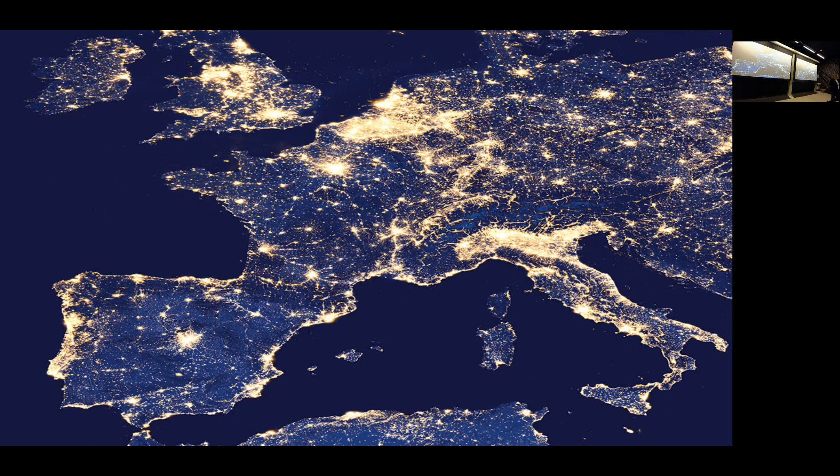We, the transmission system operator, operate the system. We keep the lights on. This is the most complex system ever designed by mankind, so says the National Science Foundation in the US. Very complex, very essential, and we have to change everything in the next 25 years. So it's like taking off in Paris in 2025, landing in Australia in 2040, and while flying, you have to change the engine, the wings, and everything. That's what needs to be done.

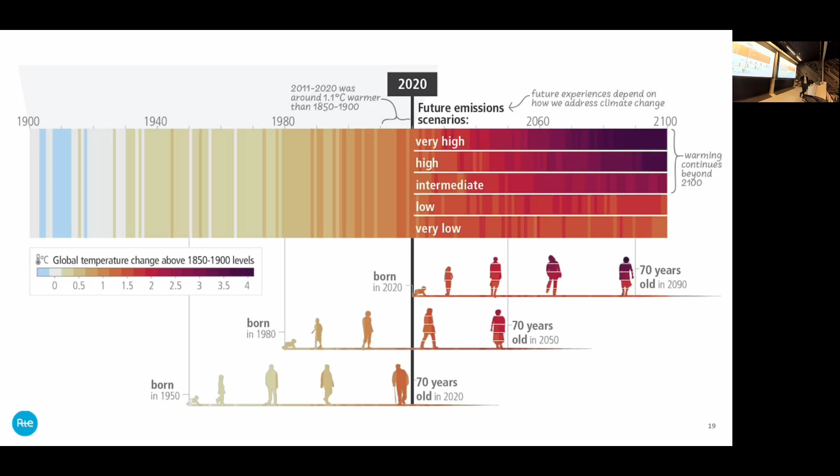We have a problem with climate change, but the top three priorities that we have as mankind are, first, novel entities. Novel entities is a subtle word for pollution, plastic, metals, top priority. The second one is biosphere integrity. We are experiencing the sixth mass extinction of life on Earth at a speed that is unprecedented. The fifth one was caused by a meteorite; this one is caused by mankind. And we are an animal. We depend on that as well.

And the third one is biogeochemical flows, from agriculture, phosphorus and nitrogen. We put a lot of that on the soil to grow the vegetables that are eaten by animals that we eat, and then all of that goes in our toilets, goes in the water, in the rivers and in the sea. And that's a top priority as well.

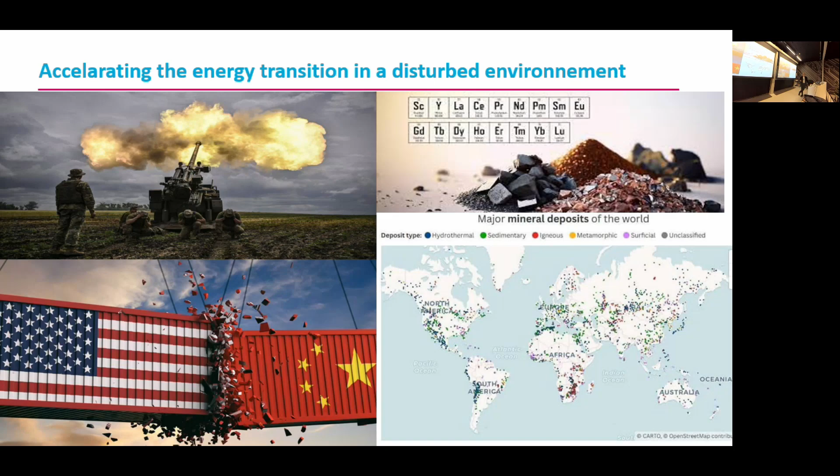So we have to change our whole energy system because of climate change. We have to care about not having an impact on biodiversity and other things. And we have to do that transformation, the energy transition, in a very disturbed environment. We have war in Europe. There is a commercial war between China and the US, and a very hostile environment from China and the US as well, towards Europe at least. And we depend on a lot of rare earths and other metals for the energy transition. So we have to make the transition, but in a very, very disturbed environment.

So do we need to be pessimistic or optimistic? Well, I prefer to be optimistic, and sometimes things are changing. For example, electricity is already the top carrier of energy in the world. There is a lot of evolution, innovation on the electrotechnical side. And that's one thing.

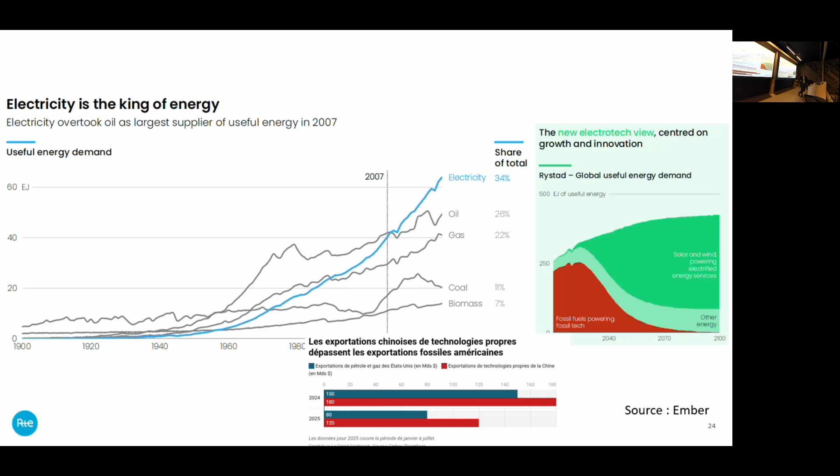And for example, in Europe, for the first time, in December 2025, for the first time there was a majority of electric vehicles among cars sold in Europe, more numerous than fossil fuel cars. So it changed. And sometimes it changed very rapidly.

So do we have to be optimistic or pessimistic? I don't know. We have to be lucid. We have to change very rapidly, but we are not doomed. Let's still do some things. And my hope is that the next Raoul Dufy will perhaps do a painting about what is happening right now in Europe. There will be a new painting of all the innovation that was needed to succeed in the transition that needs to be done.

Now have a look at RTE and its R&D and what we're doing, because there are a lot of things to do, as I mentioned. So RTE, the French transmission system operator, we own, operate, and maintain the power grid in France from 400 kV down to 63 kV. That's more than 100,000 kilometers of overhead lines. It's approximately 3,000 substations all over France. We have 52 electrical interconnections with 6 neighboring countries, soon to be 7, because there will be a new interconnection with Ireland in the coming years.

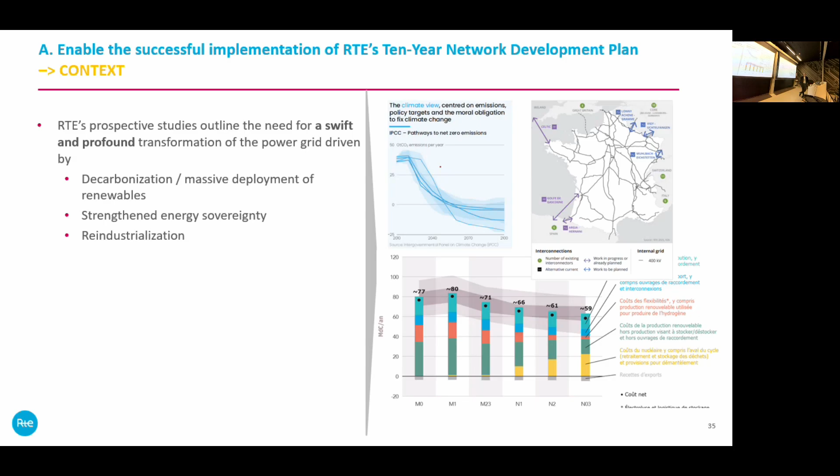So we identify 3 main scenarios, and the lowest one, the one that combines both renewable and nuclear, is a public investment of approximately 60 billion euros per year, every year from now on. That's what needs to be done if we want full decarbonization of France.

And it's a huge increase for us, because we used to have an investment of approximately 500 million euros in 2005. Last year we had an investment of 4 billion euros, and we need to reach 7 billion euros per year from 2028, and it needs to continue at that level for at least the next 15 years.

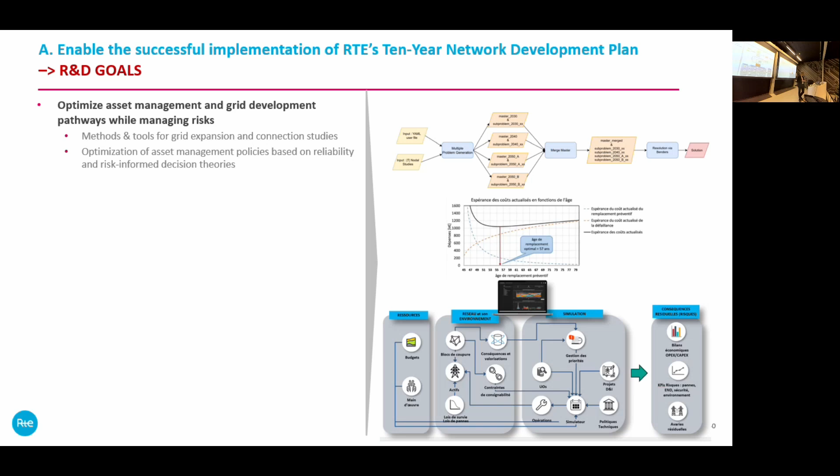We also support the performance of maintenance operations with automated grid inspection, new technology for grid maintenance decisions. Of the 10,000 employees that we have within our team, about half are maintenance people. Okay, 5,000 people doing maintenance, so they visit, they look at corrosion on the towers, problems on the substations.

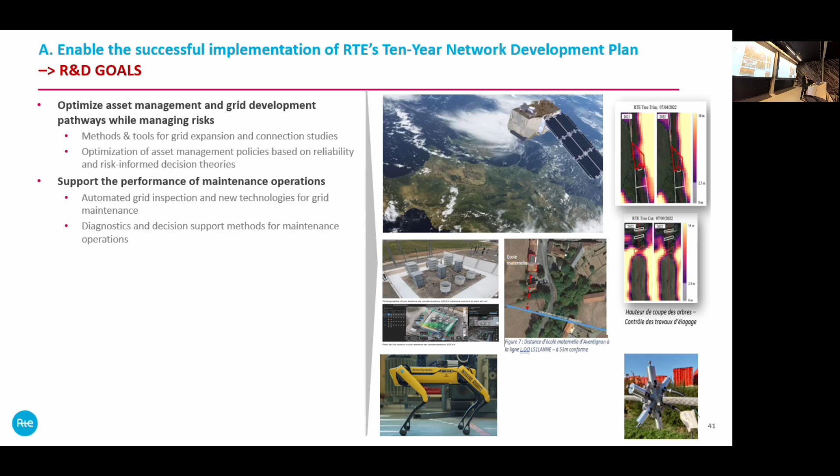And these people, and that's a key thing from the top management, they want to use these people not to do, I would say, kind of silly things that can be done by satellite imaging or drones. We want to use these people to deploy new equipment, and not to take care of looking at the old equipment, because that can be automated very easily.

We provide as well hardware and digital solutions for the efficient adaptation of the existing grid. This is the concept that we developed within RTE of this new control area. It's approximately a zone of 10 to 20 different substations. And when I try to explain that to my top management, it's like a car: you have the protection layer, at the substation level. It's very basic equipment, the safety belt, the airbag, that try to avoid any damage to the people and the equipment. We already have that.

We have a kind of Waze for the electricity sector. I mean, I'm here, I want to be there, which is the main trajectory to go there. But what we developed, and what did not exist, is the auto cruise. So we have this zonal area. We are taking measurements of what is flowing through our lines, and if we approach the limits of the overhead lines, then we decrease the generation of the renewables there.

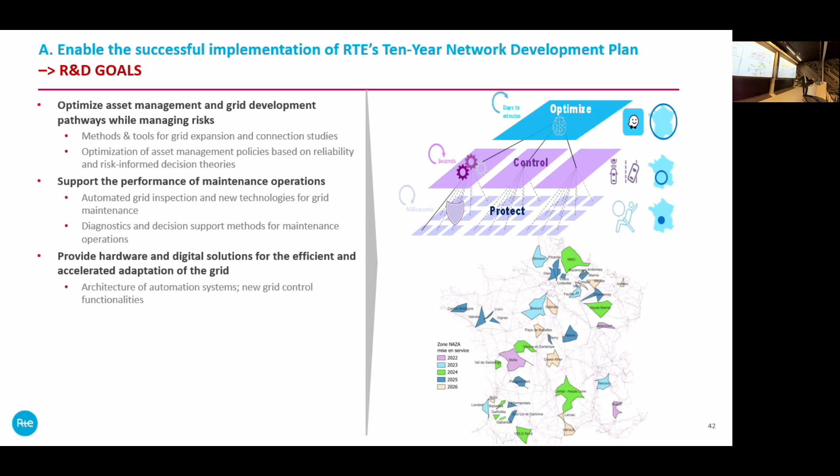So it's closed-loop control, already deployed in more than 30 areas in France, and we have a plan to develop that on 70 areas to cover all of France with this technology. And that technology has enabled us to save 7 billion euros of investment in hardware, new overhead lines. So you are using basic control strategies, IT solutions, to avoid building new lines. Overall, this technology is less than 50 million euros on one side, and you are able to save 7 billion on the other side.

So we are developing as well the virtualization of the substation. So substation, if you're looking at substation on the right side, it's one function, one device. And then you're feeding the substation with all the devices, and you have a substation. Okay. So it's very complicated to upload, to change. But now we have the technology to replace all of that with only 3 computers and applications.

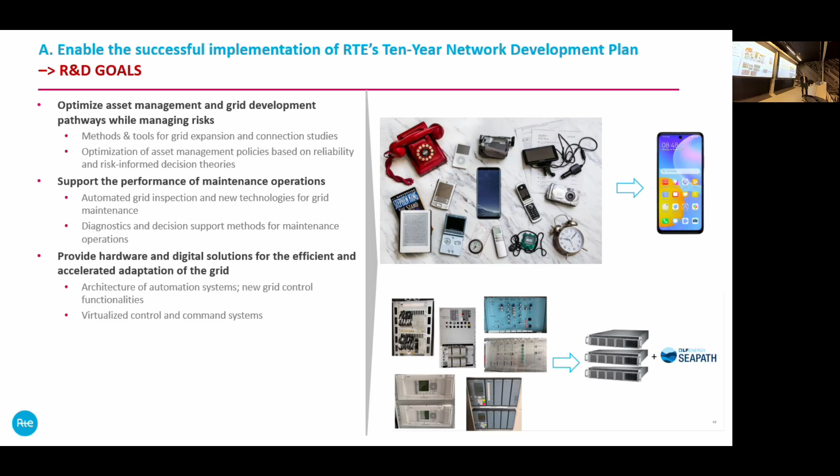So the basic idea is to move from a situation where you have one phone, one agenda, one alarm, and you pack everything on one virtualized machine, what is one iPhone, and you want to do the same thing on the substation. See? Okay, and then you are able to save a lot of money because it's less costly to deploy, less costly to maintain. And we are not so far. We already reached TRL 7 on that, so we are going for demonstration in the next years.

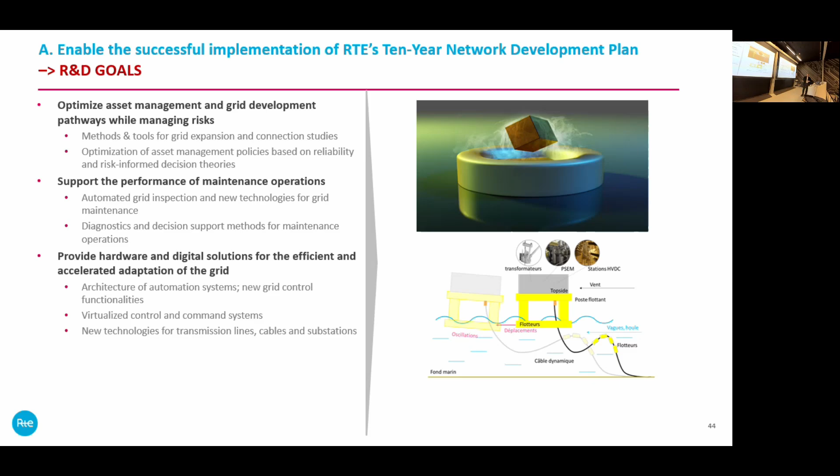We have to invent new technology for transmission lines, cables, substation, offshore wind, or I would say superconductivity as well, to have big corridors with high density of power. Okay, well, that's something we have looked at to accelerate. And we do work as well on the public acceptance of grid infrastructure. I mentioned that with Peter and Lily at lunch.

When we want to connect a new industrial area in France, that takes 8 years. 2 years is for construction work, and 6 years is for public consultations. And that's way too long for what needs to be done. So what can we bring? We have people working on social science there. Can we bring some added value to the society with transportation and so on, so that we make our overhead lines more acceptable to them.

Okay, power system operation, I'll be very quick. We have a lot of deployment of renewables there, variability, uncertainty. Just one example, when we have a surplus of generation happening in France, we have some negative prices on the wholesale spot market, and then suddenly we have a drop of the renewable generation. The latest record that we have in April is that we lost 16 gigawatts of generation in less than 10 minutes. And then when it goes like that, all the flows, all the voltages, all the frequencies, all over. We are very close to the limit.

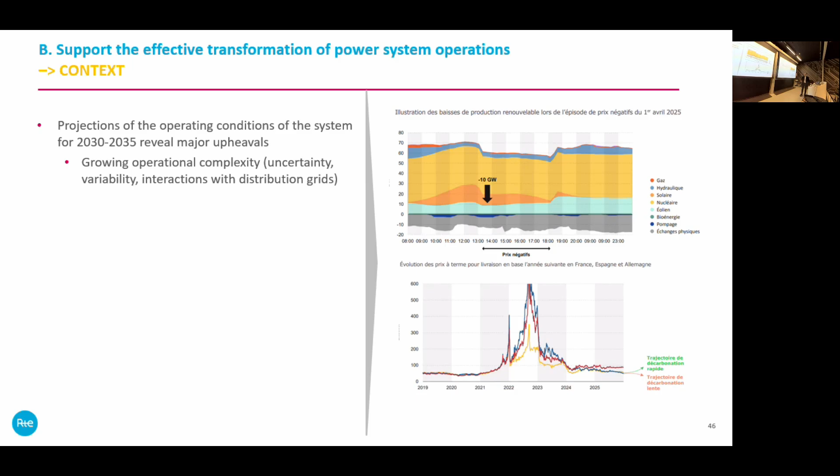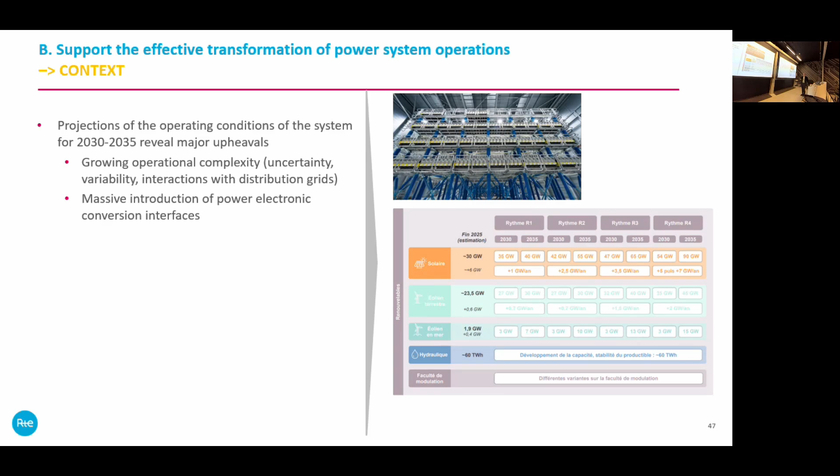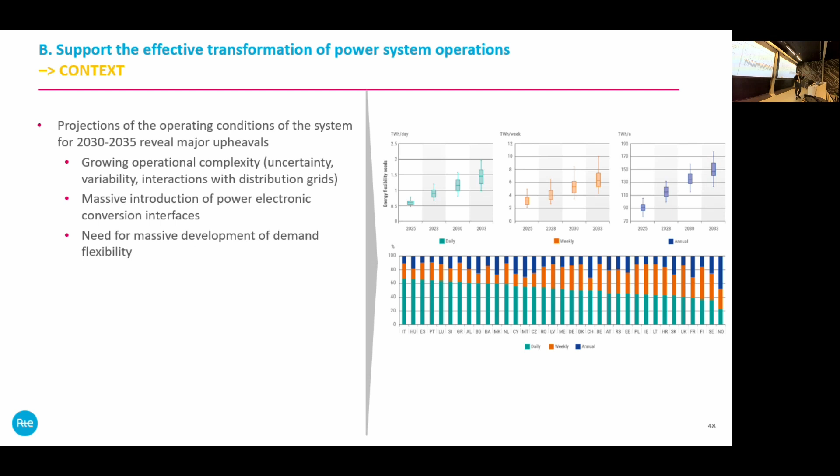We have massive introduction of power electronics everywhere, HVDC or every new generation or every new load. When we're speaking about the AI data center, it's power electronics. Okay. That changed the very basics of the system. We need to have a massive deployment of demand flexibility. We have a lot of variability on the generation side, so we need to match that with demand flexibility on the other side. And overall, we want to avoid that situation.

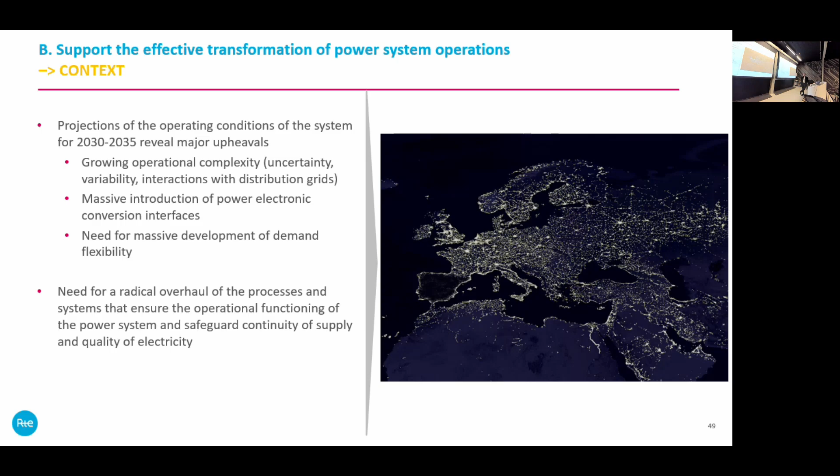What do we do? A lot of decision support tools for our control center in Paris. We want them to have forecast, weather forecast, generation forecast, load forecast, and to decide which is the best trajectory so that they can operate the system in the next hours. So we have a lot of decision support tools there.

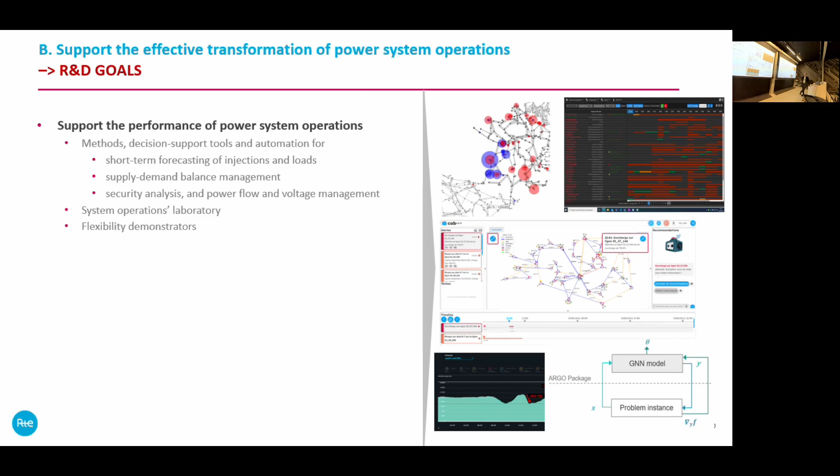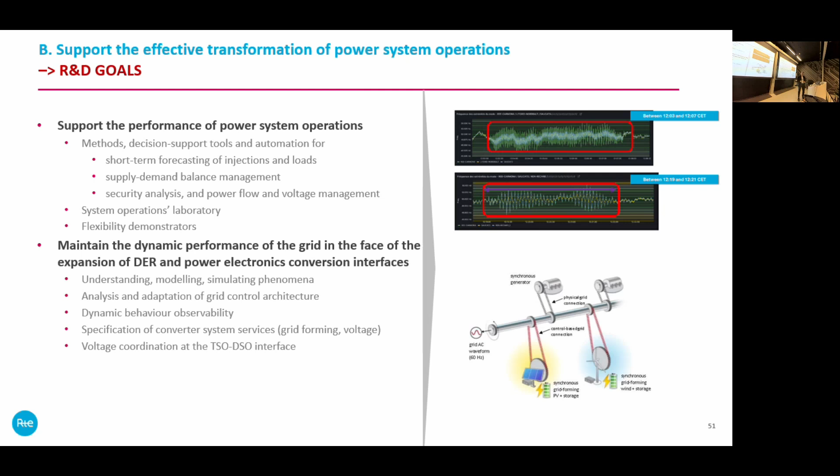We also have to maintain the dynamic performance of the grid. So basically, a lot of the power electronics nowadays is grid following power electronics. So it's still following the frequency of the power system that is still produced by the synchronous machines. But in a world where there is no synchronous machine, you have nobody to follow. So you need to invent and to deploy grid forming technology. And we have to deploy and enable the massive deployment of flexibility.

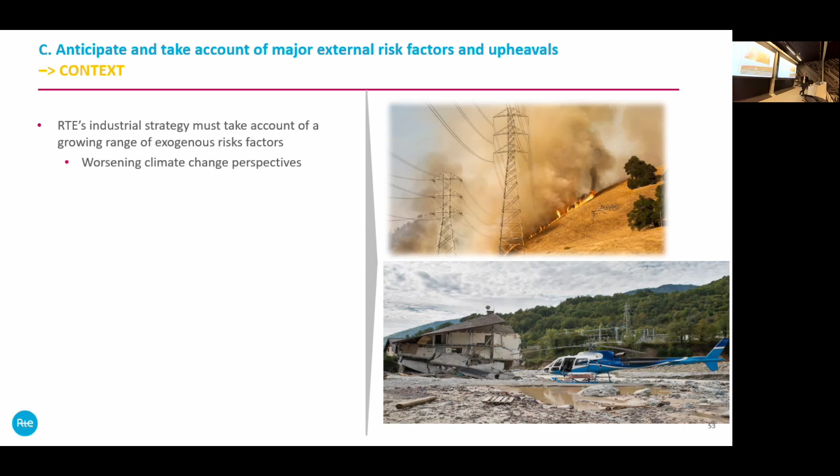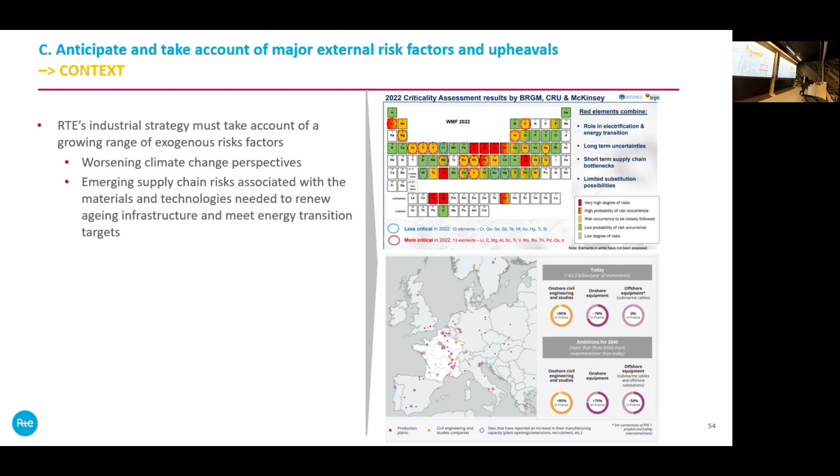And that will be my last 3 slides about what needs to be done. Okay, the context, we have climate change, we have this competition for metals and rare earths, so we have to identify what our vulnerabilities are there. And there are geopolitical and economic environments that need to be considered. So what we are doing, we are using a lot of models to model the climate change.

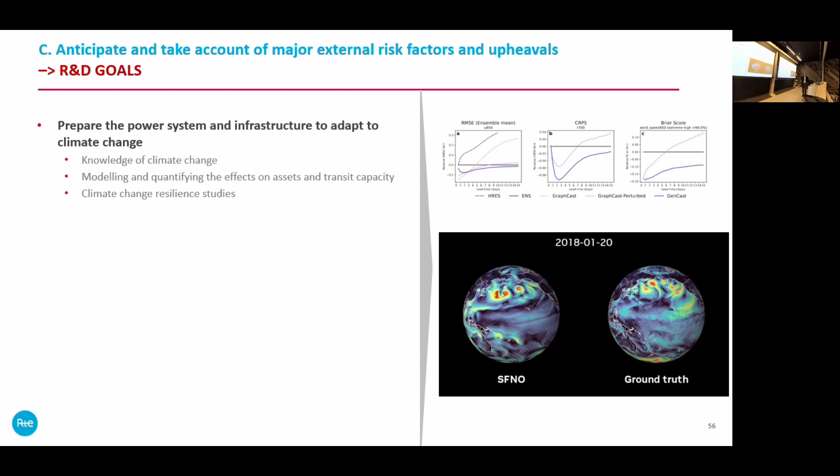I mean, in Europe, we don't have to be shy. We have the best modeling 10-year development plan in the world. If you're looking at what they're doing in the US and what we're doing in Europe, we are far above them. We don't have to be shy, but we continue to improve. We have to analyze our vulnerabilities when it comes to our supply chain transformation.

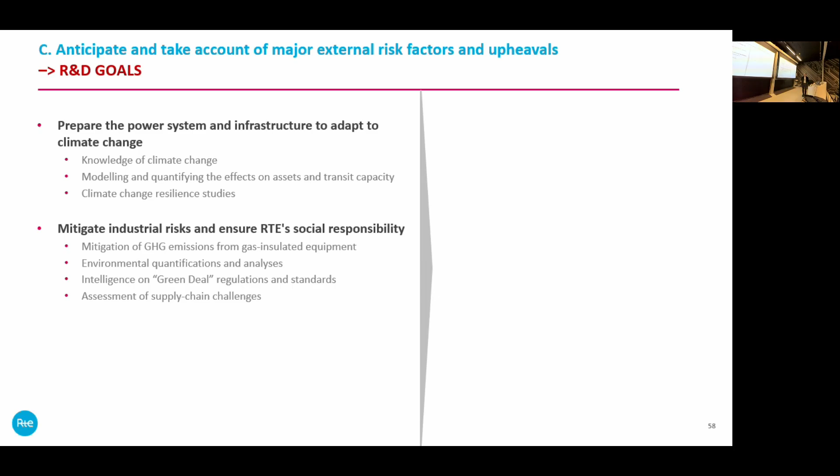And we have also to consider new opportunities for new game changer technology. Okay, what about direct air capture? What about geothermal technology? What about hydrogen and so on? I mean, that's not for today. That's not for the day after today, but there may be real game changers in the future if we want to have this energy transition in France and in Europe.